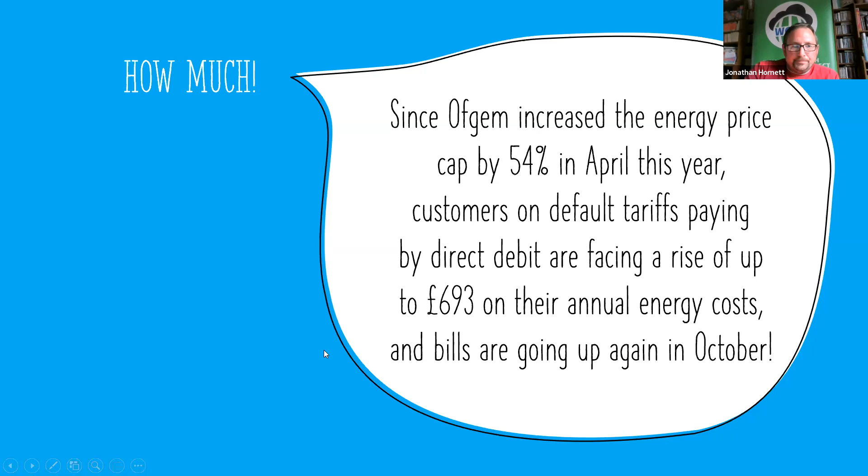So what can we do about it? Well besides keeping the bills down by doing the obvious things like turning off lights, like myself and Greg Haynes had done at the start of this presentation, or running your appliances on eco mode, getting the most energy efficient things that you can, which is what the Energy Basics presentation was all about, there are lots of other things you can do to reduce the amount of energy you're using that you may or may not have thought of.

The big thing you can do is make changes to where you live, make changes to the office or wherever you work. This presentation has a few examples of adaptations and changes that you can do that could save you money and lower your carbon footprint. And believe it or not, they're both the same thing.

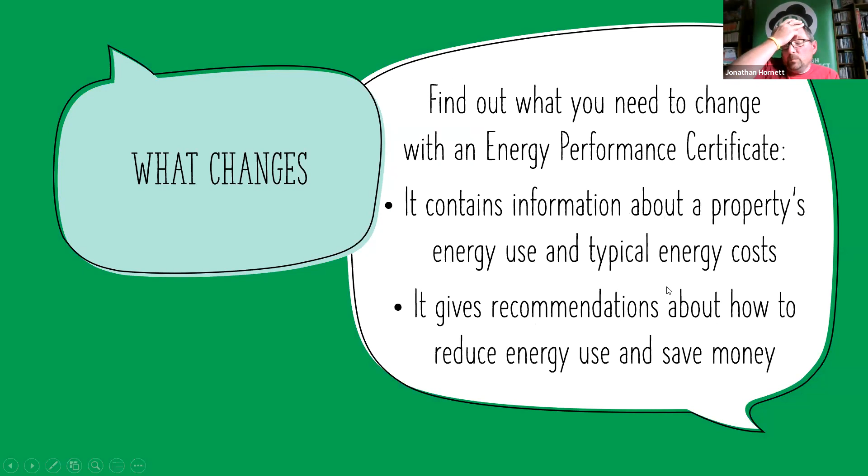So what changes can you make? Well, I've tried to do this presentation with reference to people's houses. So the way I've done it is to look at what would you do if you needed to sell your house or rent it out. Well, the government have kind of helped us with that, which is nice of them.

They've got something called an Energy Performance Certificate, or EPC. The good news is it pretty much does the work for you. It contains information about your property's energy use and typical energy costs, and it also gives you recommendations on how to reduce energy and obviously save money.

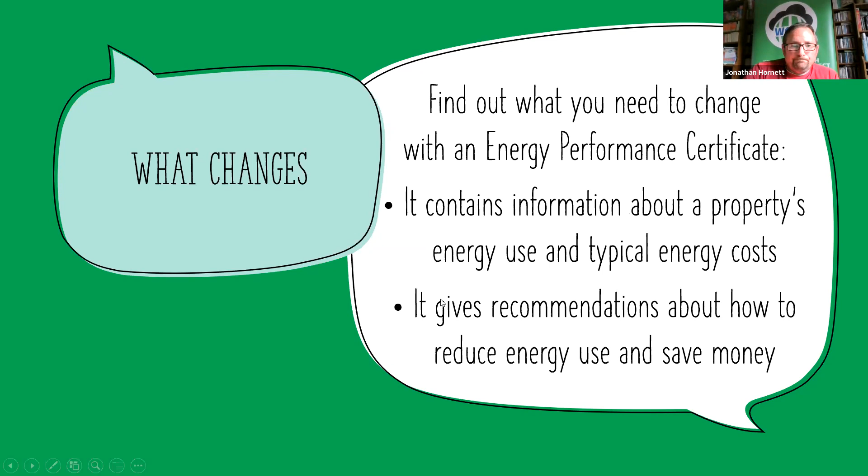Your EPC has 2 charts. I'm explaining all of this to you because I'm going to be referring to this throughout the presentation, so I thought we'd get this bit out of the way. Then hopefully you can follow what I'm saying as we go through the presentation.

The bands go from A to G, A being the best, G being the worst. In the charts you can see what your current rating is and your potential rating, and it also gives you sort of what you can achieve with the recommended home improvements that they've suggested to you.

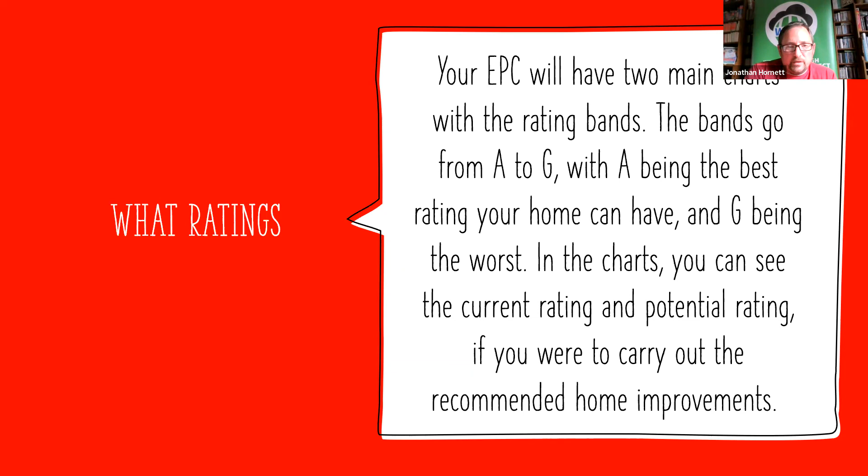So what does one look like? Well, there's one of them. Most people will be looking at their energy efficiency rating because that's the one that saves them money.

As you can see, this house has got a current score of 69 standard assessment procedure points. That's the standard the government have set, their numbering system, going from 1 to 100. Points make prizes, essentially. If you get between 92 and 100 points, you're an A-rated house. If you live, crikey, I don't know what you'd have to live in to get a G, you'd only get 1 to 20 points.

As you can see, these are nicely separated into bands. They look quite a bit like what you'd see on your fridge, cooker, or even tellies now have them on. So the government have done it like this, or should I say the EU have done it like this, and I believe the Brits have now stuck a Union Jack over the EU flag.

Just to make it simple for you so people can understand it. The real advantage is that when you're looking to buy or rent a house, you can compare different houses and work out how much it's going to cost you to have that house.

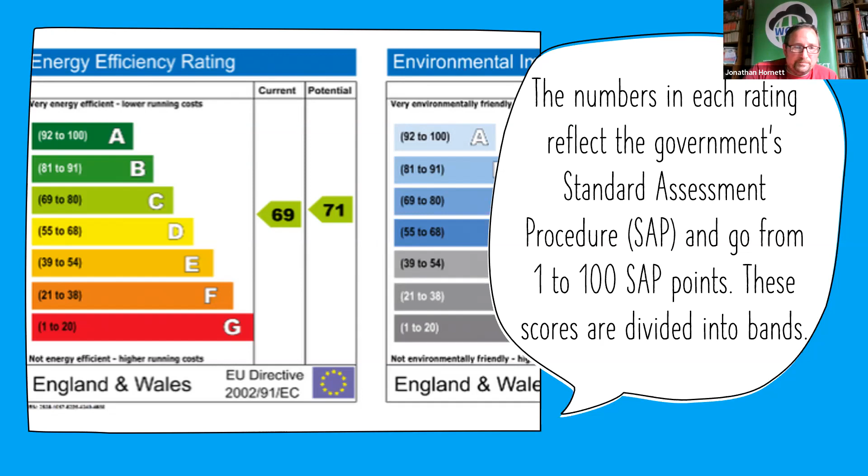But this has two charts, you may have noticed. It also has an environmental impact rating. So you can see the scores are pretty much the same, funnily enough. The difference is about the same as well, 1 or 2 points difference.

So the EPC bands show you how much energy your property will use, as well as how much carbon it'll emit each year. Our house here is a 71. With their recommendations, it moves up to 74. Now their recommendations are fairly basic, so we're going to look at some things that could move it up even more.

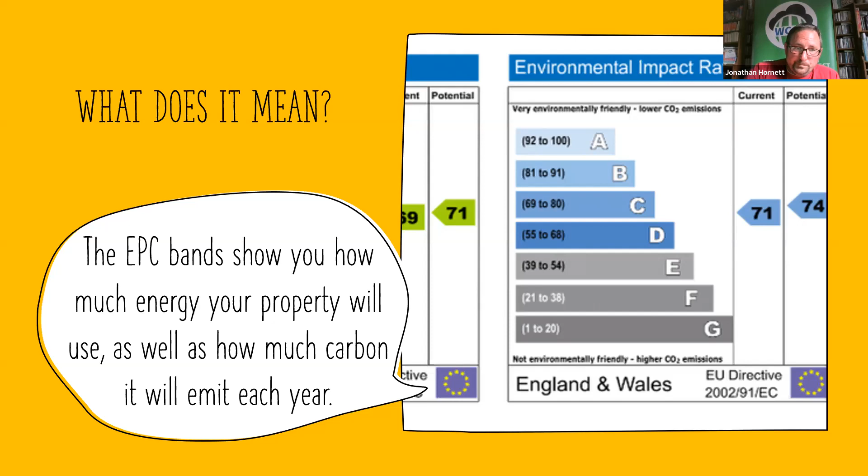But of course, first you might have one of these. I know I haven't. My wife's actually training to do this, so I'm not saying she's offering her services, because she's doing it for the housing association she's working for.

But what most people, and estate agents, would do is look at the government's EPC register to find an accredited energy assessor. It costs between £35 and £100. Obviously, if you're paying somebody to pay somebody else, it's going to be more than if you go and have a look for one yourself.

Once they've done it, or if you wanted to look beforehand, you can look at other people's properties for their certificate on the EPC register. That's quite handy because some of your neighbours might have had it done already.

Okay, the bad news is your efficiency probably isn't very good. According to the BBC, nearly two-thirds of homes fail to meet long-term energy efficiency targets. More than 12 million homes - and I must admit, that's the one thing I forgot to adjust in the presentation, what percentage of actual homes that is - fall below the C grade on the energy performance certificates.

Obviously, like I say, they were graded A to G. So C's a bit like GCSEs, if you like. If you're of a certain age, a C means an O level. I would say you don't really get a pass until you get a C.

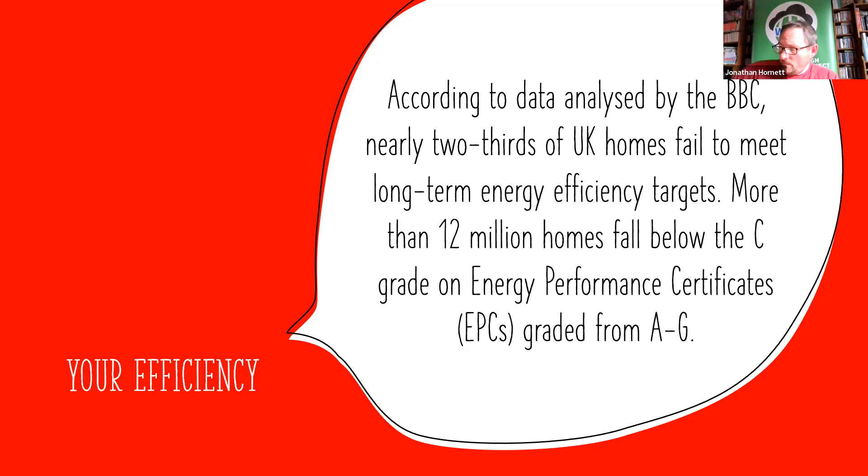Okay, the main reason for this is poor insulation. There's this third thing again, but did you know only a third of homes in the UK have updated their insulation? With energy prices soaring, it's probably the best bang for buck, the best investment you'll get for upgrading your house, is to upgrade its insulation.

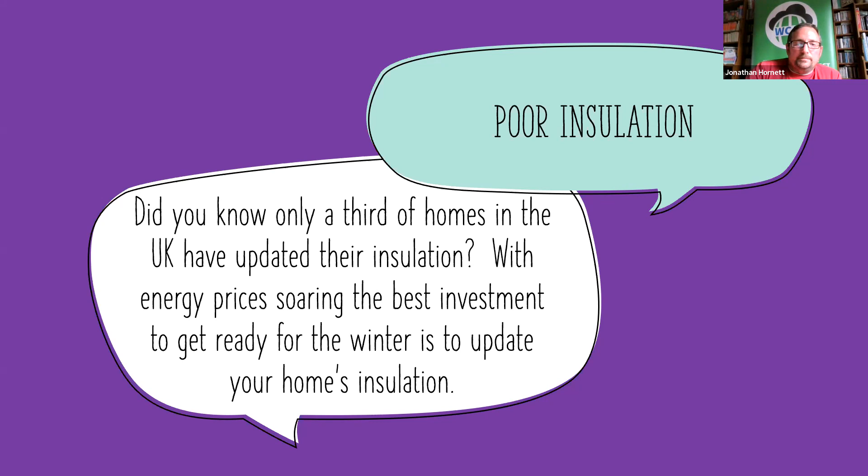So guess what we're talking about first? Well, we're talking about why. We've all got cold houses in the winter, and sometimes very hot houses in the summer.

Only 7.5% of UK homes have insulation age of 2002 or younger. The reason why it's 2002 is because that's when the improved regulations came out. So most houses do not meet current regulations.

In homes built before 1976, and I must admit, I'm going to hold my hand up, this is me, only 0.03% of homes have been updated with additional energy efficiency measures. I'm guessing that probably rules out double glazing, but you can imagine things like loft insulation, wall insulation, all the things we're just about to talk about. So 92.5% fail to meet the current insulation regulations.

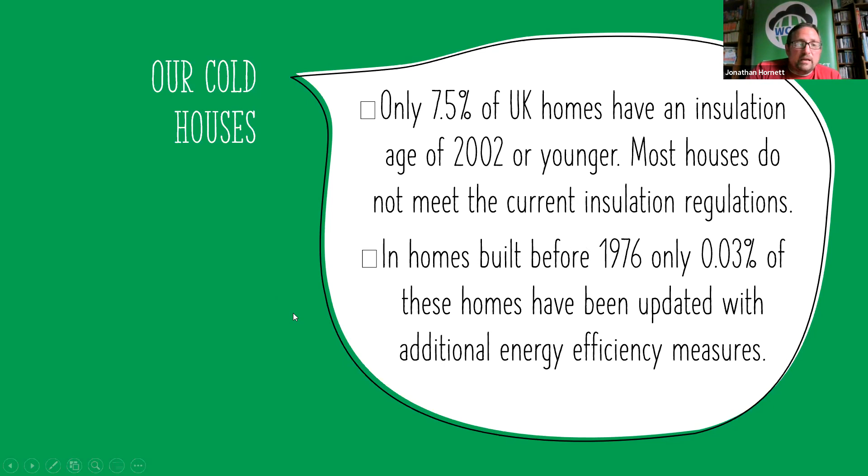Why is it important to insulate your home? Well, it's better for you. It keeps you warmer, it's much better for your health. You're not going to get fluctuations in temperature. It can prevent damp, which is not very good for you - it causes mold and mildew, can cause breathing issues and all sorts.

Future heating changes - this is a big one, because with new tech coming out like heat pumps, you can be ready for anything if you've got a nicely insulated house. And of course, the big one for us on Wellingborough Climate Action Project is that it's better for the planet - wasting less energy means your carbon emissions will drop.

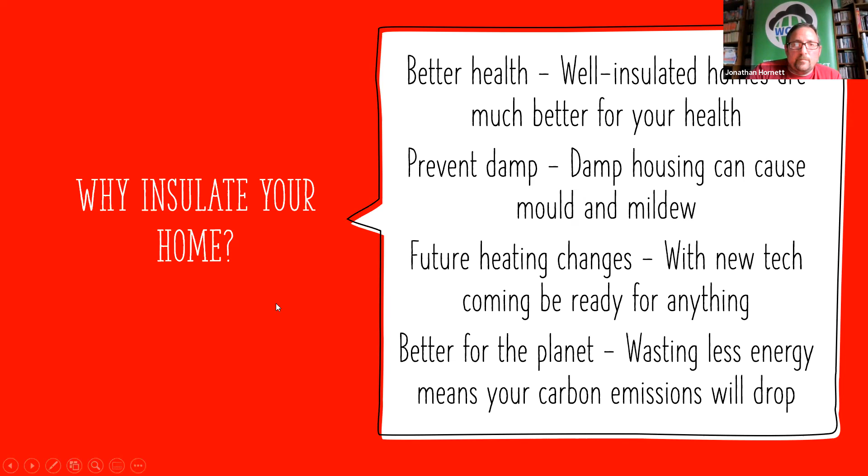So the big message is stop wasting heat. You don't have to burn it, you don't have to pay for it. So the place to start could be your loft. If your loft insulation isn't efficient, 25% of your home heat, a quarter of it, goes out the roof.

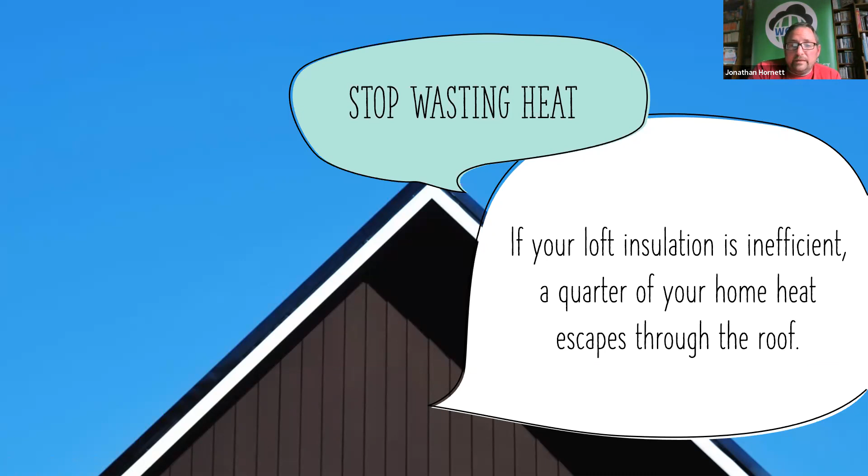We'll have a quick look at that because it links in nicely with your EPC rating. It's one of the cheapest, if not the cheapest and easiest ways to improve your EPC rating. Going from no insulation or really poor insulation to the recommended amount of 270 millimeters, 27 centimeters, can improve your rating by 10 or 15 points.

So imagine if you're on 50, you're now on 65, or 60 to 65. Whilst even a top up of existing insulation can get you 2 to 5 points, depending on what it is, as an improvement in most cases.

This presentation is called energy savings, so we may have a few slides that actually show what the savings are. Here's your first one, I've tried to keep it simple. I know we don't all live in a 3-bed semi-detached house, but that's what most of us live in according to data.

So a typical 3-bed semi will cost you around £530 for a professional installation. You could save £255 on your energy bill. So as you can see, in 2 years you've pretty much paid for the professional installation, as well as saving 600 kilograms of carbon dioxide emissions each year by insulating an uninsulated loft with 270 millimeters of loft insulation.

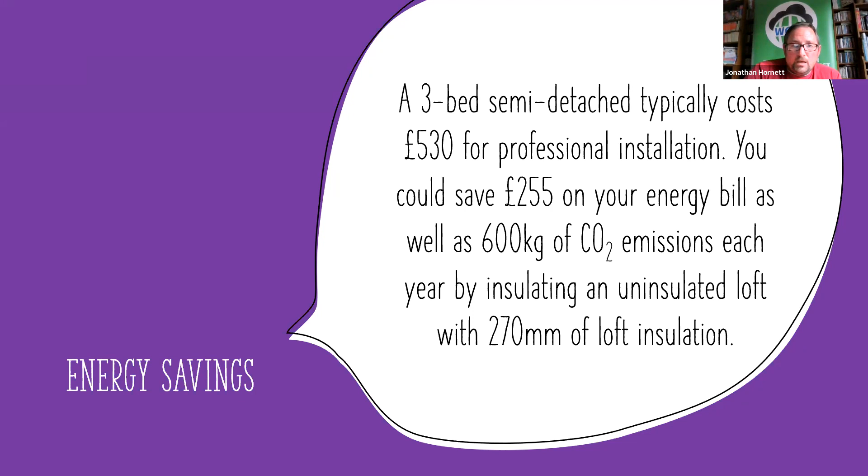Which is staggering. But you could even do it cheaper - you can do it yourself. So if you pop down to B&Q or other leading DIY shops, I'm sure they'll sell it to you cheaper, and it's easy peasy to put in.

It comes in rolls or batts. Batts are long lengths of it that just slot between the floorboards, and it has no damp or condensation problems. It's easy peasy to put in, like I just said. And in many cases, if you've got a relatively easy accessible loft, you could do it yourself.

We've already said the recommended depth of mineral wool - the recommended depth is 270 millimeters. That's for mineral wool, but other materials need different depths. As the world gets bigger and lots of things are going everywhere, there's lots more options.

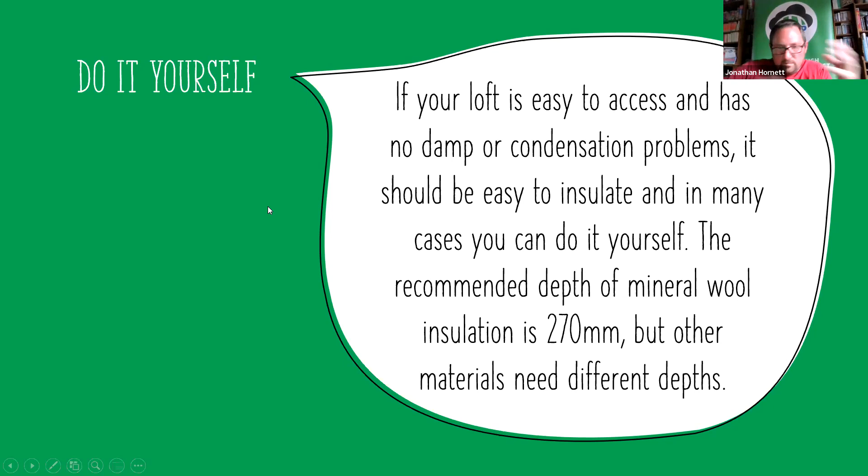So here are a few of them. Obviously blanket insulation is the most common - it's normally glass wool, it has been for decades. It's currently made out of recycled bottles, so that's really green, better than putting them in a hole. And as I said, glass wool is really easy to put down and install, and is really cost effective.

And I'll apologise now for my photos - they've been added as per request of Marion. So that looks almost like one of Greggs' pasties, but there we go. Not one of the Greggs we've got, I must say.

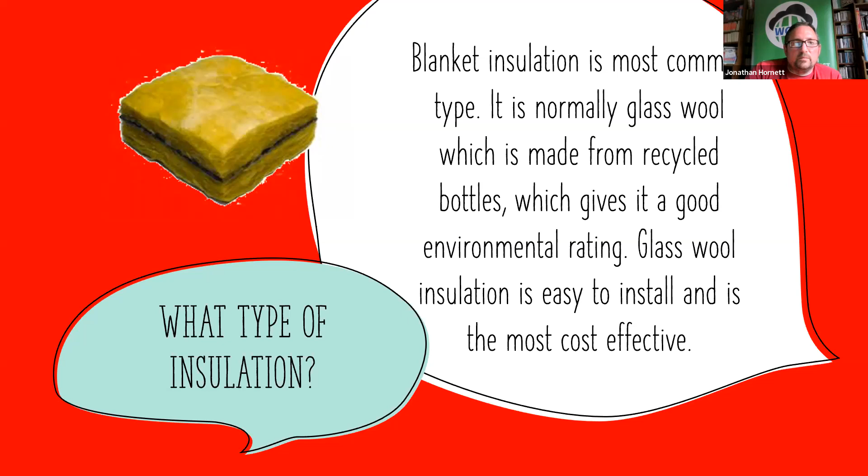And of course there's more alternatives than glass wool. There's rock mineral wool, which is more solid than glass wool, so it's suitable for situations where it can be squashed - it's less squidgy. It comes in rolls and batts, and can come in varying thicknesses. It's also very good against fire, which is a big concern with a lot of the problems we've had recently in high rises. So it's resilient to heat and fire, making it a really good material to use.

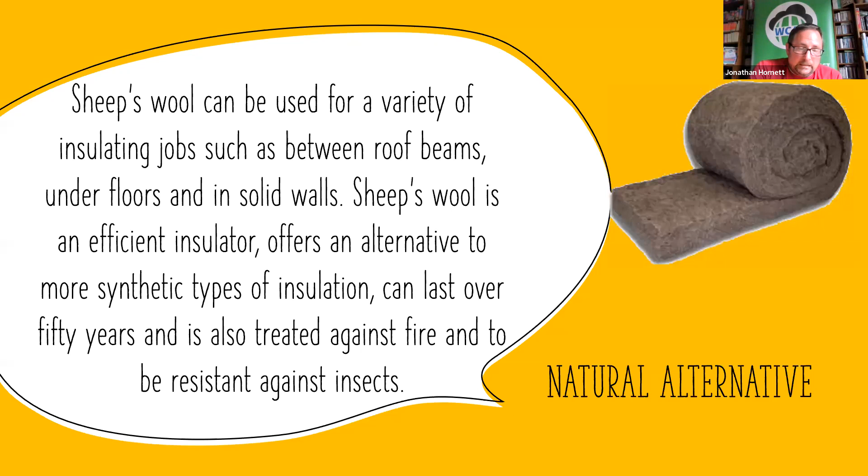Of course, there's more options too. There's lots of natural alternatives, and this is a bit of an odd one - wool is a new thing for this use. Obviously wool isn't new, but using it to insulate your loft is. It can be used in roof beams like the other stuff, but commonly under floors and in solid walls. It's an excellent insulator, which is why you wear it as a jumper. It offers an alternative to synthetic fibres of insulation, and it can last over 50 years. Don't worry, you won't get bugs in it because they treat it against that, and they also treat it against fire. There's also lots of other natural fibres you can put in.

You can have hemp and cotton, just as natural as sheep's wool and just as effective. Hemp is also really cheap, very sustainable, and again you can get it in a roll or as a batt.

Or a slab form. Wood and wood-based products like MDF, plywood. Wood's always been a really good insulator, so there's another option there if you wanted to use that. Believe it or not, recycled paper and plant cellulose. It's another wood-based product, but plant cellulose will do a great job insulating your home. It's equally as sustainable, coming from crop waste, and they do treat that as well.

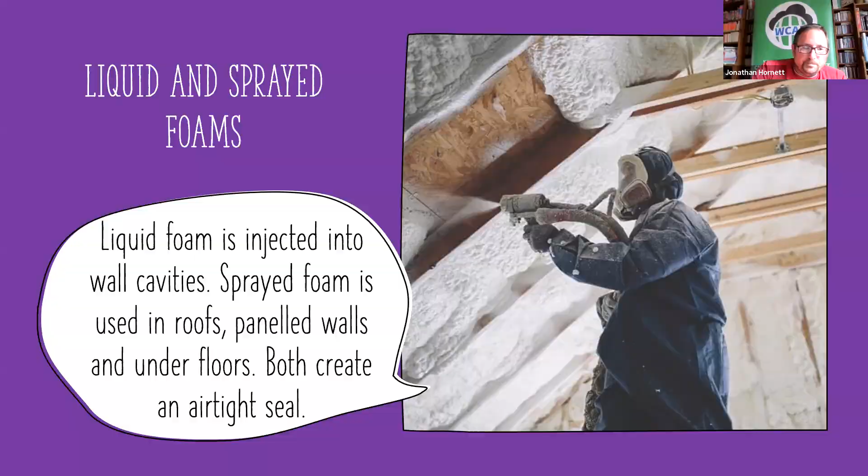There's a lot of bad press for this as well, but if done correctly, this can be up to twice as efficient as with a sealed capsule thing, because it just traps a lot more heat. But you do have to be careful and use trusted people that will give you a guarantee on it, of course.

Just on this one, we used a similar material, not the same, to insulate under our floorboards, and because of the shape of it, it was quite straightforward to cut out the shapes and sit it in.

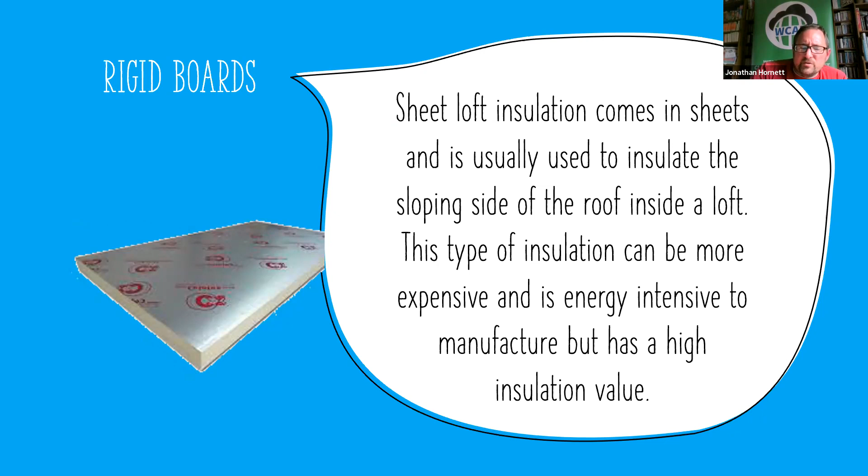Well, believe it or not, when I was Googling for pictures last night, I came up with quite a few people who craft with this stuff. So you nearly had some nice sculptures made out of this rather than just blocks on your screen. But I thought that wouldn't be the thing.

Anywho, rigid foam, if you don't want it sprayed, you can get it in blocks. It's a great thing where weight needs support, like possibly under your floor in lofts, as well as having rigidity and durability.

Rigid foam can also be good if you've got noisy neighbours, for instance. It's got excellent sound insulation, because it stops a lot of the sound coming through your walls and floors. So it's great in flats, you can insulate between the two floors, for instance.

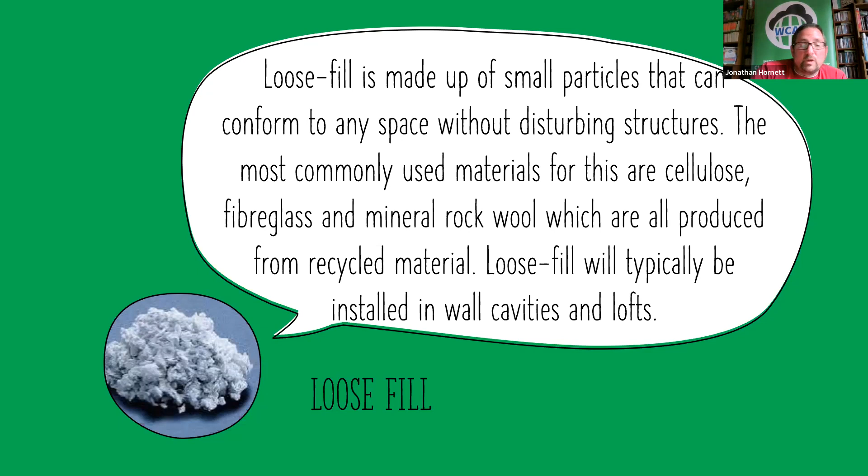And loose fill, as well as having liquid foam put in your cavity walls, you can have loose fill, and you can put this in your loft as well. It's made up of small particles that, just like foam, can conform to any space without disturbing structures. The most commonly used materials for this are cellulose, fiberglass, and our old friend mineral rock wool, which are all produced from recycled materials. Loose fill will typically be installed in wall cavities, but you can also put it in lofts, depending on how often you use them.

We're talking about wall insulation now. 25% of the heat goes through your roof, and another third goes through your walls. It's something not a lot of people think of when insulating their houses, but it's becoming more popular because the prices are coming down. You may have noticed a lot of the housing associations in Northampton and Rushden have been doing it to their properties. It just saves bills - people don't even really turn their heating on anymore because it cuts down on the heat going out, but it also insulates against heat coming in. So it could make your house an awful lot more comfortable.

So if your house was built in the last... sorry, we've got a hand up. Kevin, did you want to ask a question?

Yes, I'm interested in the cost of all these. They're all kind of similar products performing a similar function. I think you've already indicated a range of prices, but all of this depends on the people who need this, probably living in worse homes, older homes, and ones which aren't so well insulated. It seems to depend on the money being available, and we had a lot of free installation offered over the past 10, 15, 20 years.

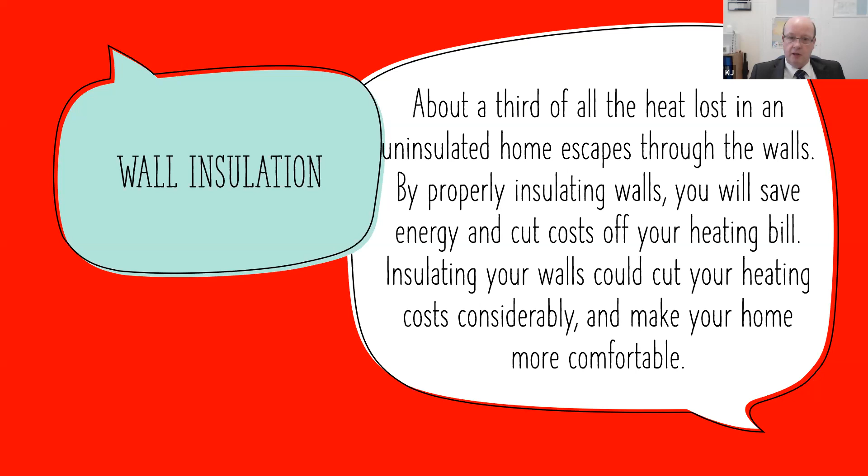I totally agree with you, Kevin, and we are going to cover that right at the end. So I might leave you thinking that, because otherwise I'll spoil the last bit of the presentation, if you don't mind. Yeah, there are considerable costs. I will try and go through some of the costs per type of insulation, and then we'll have a look at what help, if any, is available.

Okay, so if your house was built in the last 20 years, the likelihood is that your walls are already insulated. But if it's older, you need to check what walls you have. Solid walls have no gap. As a rule of thumb, solid walls are the ones that have a full brick and then half a brick, then a full brick and then half a brick. It's an older way of doing it.

New houses haven't quite gone to that artistry, if you like. I used to live in a house with solid brick, half brick, solid brick, quarter brick, just to confuse the life out of you. But new houses basically have the bricks the full way on, because there's two layers to it and not enough room to turn them round and be arty with it. Older houses, like the one I'm in, have the alternating bricks.

So if you've got a solid wall, they obviously can't be filled with cavity wall insulation. If you've got cavity walls made up of two layers, there's a small gap between them, and that's called a cavity.

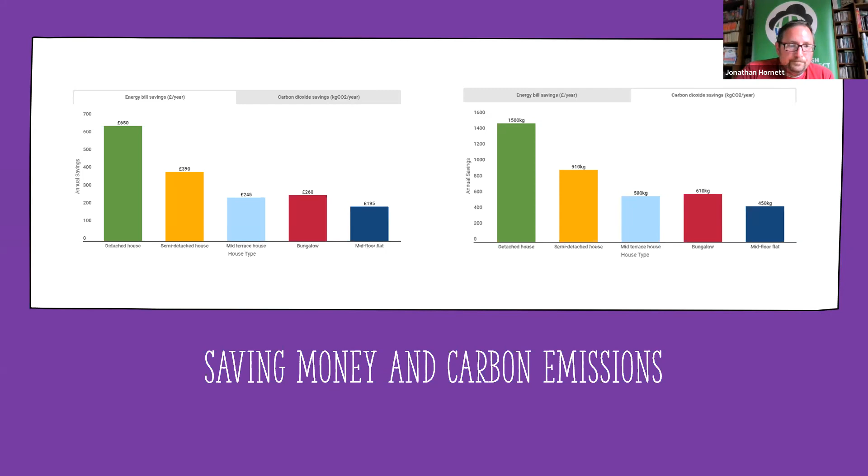So if your property has solid walls, the EPC rating is going to be much lower than an equivalent cavity wall property. The good news is that the rating of the property can increase by 10 to 20 points or more by insulating externally or internally. So if maximising your EPC is your thing, i.e. you're trying to sell your house or rent it out, this could be the way to go.

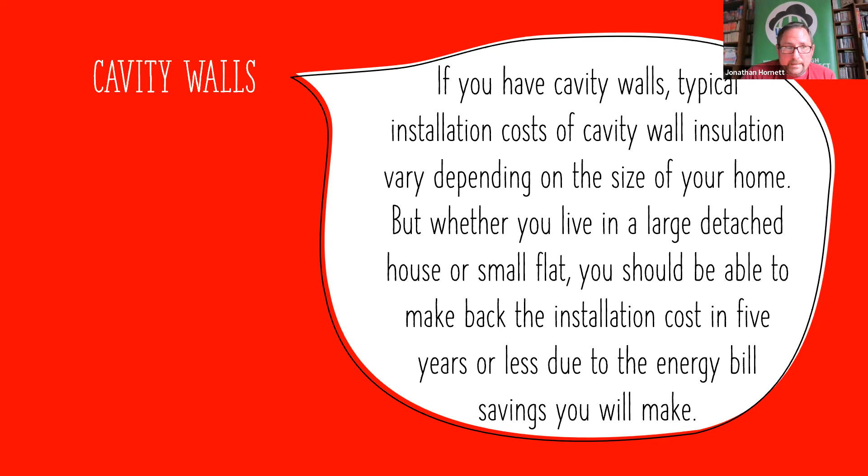But the typical installation costs for cavity wall insulation, if you were unlucky to have missed that boat, depending on the size of your home, obviously vary quite a lot. But whether you live in a large detached house or a small flat, you should be able to make back the installation costs within 5 years or less, and probably even less now that bills have gone up, due to the energy bill savings you'll make. So that's one of the best investments that you can make.

Some people may not have £1,200 or whatever it is laying about, but can still do things like stopping drafts, which is one of the cheapest and most effective ways to save energy and money. When drafts are uncontrolled, and I think we've all lived in houses like that, or I had a friend with a house very similar to Marion's, in the winter you might as well have been sitting in a bus stop. Too much air coming in, and what cold air does is push hot air out. So to draft proof your home, you should block up unwanted gaps that let the cold air in and the warm air out. I'll give you some pointers on that later in the presentation.

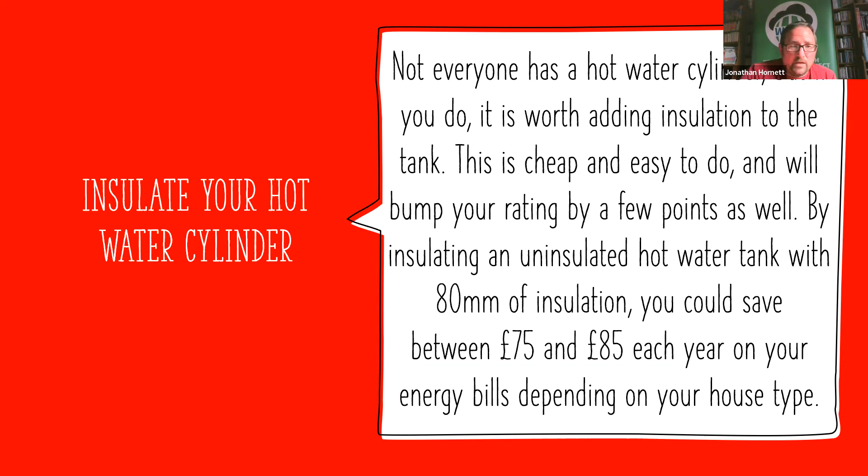So you've done that, you've got a nice warm hot water tank, but you've still got a really old boiler. Upgrading your heating system is one of the key factors in the EPC.

If you have an old boiler, upgrading it to a new condensing model will improve your rating by 5 to even 20 points, depending on the age of your current system. One of my neighbours did it a few years ago. They got rid of their old back boiler, which looked industrial, let's put it that way. Their new boiler cost them an awful lot less money to use, and obviously it uses a lot less energy.

Heating and hot water accounts for half of what you spend in a year. It's what your gas bill's all about if you've got gas, and why your gas bill is quite often more expensive than your electricity bill. All modern, well-maintained boilers burn their fuel efficiently, but inevitably some of that heat just goes up the chimney or escapes through the flue.

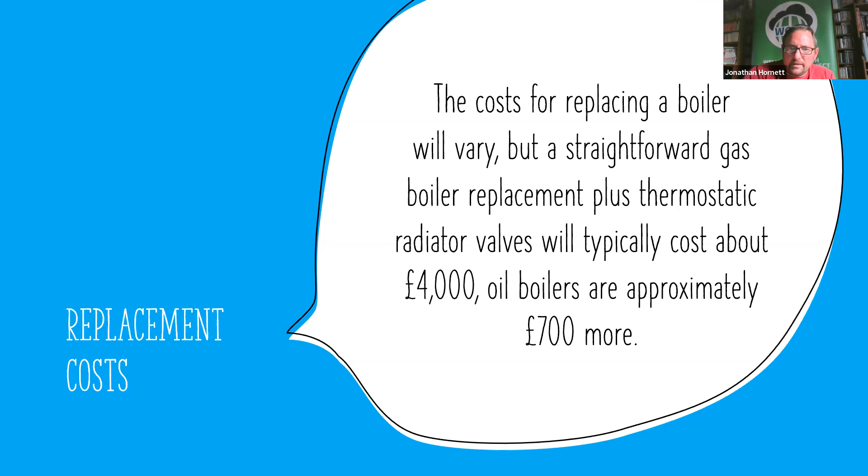I suppose the thing is you're thinking about other options, and maybe something like an underfloor heating option might be more what you're actually wanting to achieve than trying to get that indirectly from the gas boiler. And obviously, if the gases cool down too much, they may not be going out as efficiently as they probably are now. But again, myself and Marion aren't the complete experts on this.

Be interesting, Kevin, to know what rating your boiler has now, with a programmer, room thermostat, and thermostatic radiator controls. So again, it's another huge lump off your fuel bill.

But obviously, and this is aimed at you, Kevin, as much as everybody else, is what's next. It may be time to change your boiler, but if you're thinking ahead for when it needs to be replaced, you'll need to decide what type of heating system is right for you. Now might not be the right time to switch to another gas boiler, because new technology is coming on leaps and bounds. So it might be the right time to switch to a low carbon or zero carbon heating system.

Are you going to say this in your next slide, Jonathan? Almost guaranteed, Marion. Go on, should we go to the next slide and you can tell me if it's not there? No, but it's probably on the next one. I'll do the next two slides and then you can come in.

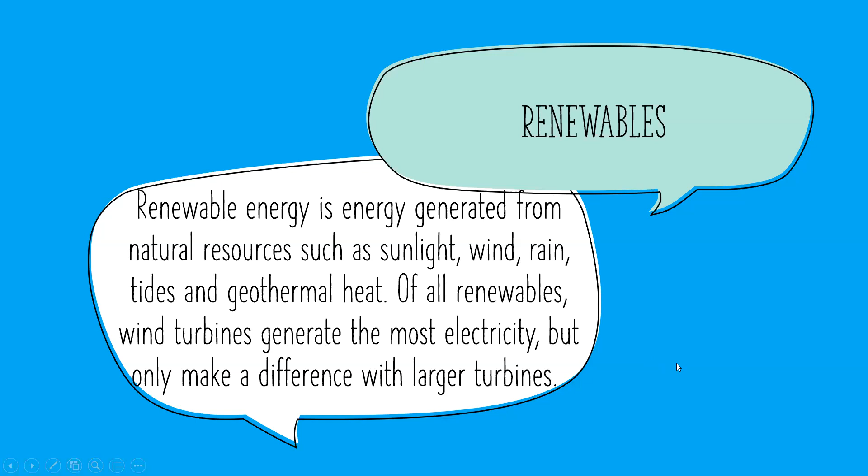So renewables is the subject of our next presentation. I won't go into this too much, but let's touch on it because it does give you big savings, and this presentation is all about energy savings. Renewable energy is generated from natural resources such as sunlight, wind, rain, tides and geothermal heat.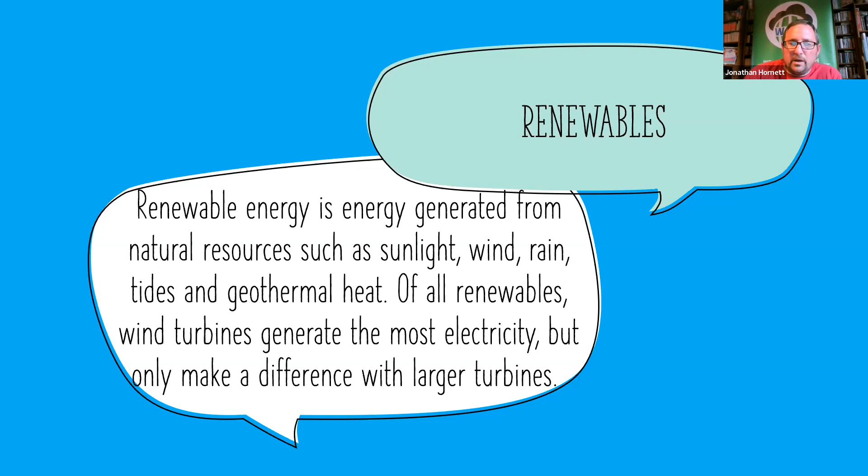Of all renewables, wind turbines generate the most electricity, but unless you've got a farm, you're not going to be able to put a big enough one in or on your property to make much of a difference, particularly when you're talking about your EPC rating. So possibly the best thing to do is solar panels.

Here's a 3-bed semi-detached house again, possibly. By adding a 16-panel, 4 kilowatt solar system, you could produce around 2,850 kilowatt hours of electricity in a year. Plus, you could add 10 points to your EPC rating.

Now, myself and Marion were talking about these slides yesterday. It turns out that Marion only uses about 2,850 kilowatt hours a year. So if it's replacing the heating as well, that would change. But somebody who's preparing a presentation for next week is going to tell us that what he produces more than makes up for what he uses in a year. I won't spoil that too much, but I'm looking forward to seeing his report from what he's been doing over the last few years.

Solar thermal was a big thing before solar PV, solar photovoltaics, came out. My mum's got one on her roof. It supplies all of her hot water and also a little bit for the radiators too. It fills her little tank up quite nicely, keeps it hot for the whole day, and doesn't cost her a penny. She's had it up there for now 15 years, so it's still going and still as good as it was.

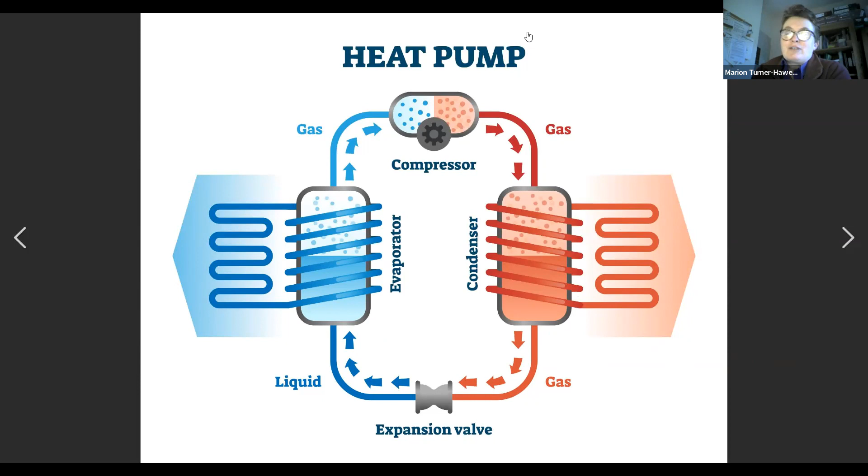And so it's kind of opposite to what we've been doing with central heating systems run by gas or oil. They've been making the surface area smaller, whereas for a heat pump you need the surface area to be bigger. So there's a bit of a problem with that, but I'm not an expert on this, and we have an expert coming next week, so you might want to ask that question again, Gail. That's my minimal attempt at what we're trying to say.

Can I say something? I was watching a program on them the other day, and they were saying you couldn't really put it onto your existing radiator system because the pipes are far too narrow, and the radiators would have to be a lot bigger. Also, to make it viable, you should have an underfloor heating system - that's the only way to really do it, because of the expanse you need under the floor. That's what I heard anyway.

Yeah, so there's a lot of myths, isn't there? I think that picture basically showed a coil system heating up some water which could possibly be pumped around your house, just like your current boiler does. So the answer is I don't know. We do need somebody like Marion's friend from Wales who's going to tell us all about it and try to squash some of these myths.

Yeah, so Darlene will be coming and explaining it all to us next week. Karen, did you want to ask another question, or was that to say what you just said a minute ago? I think Greg's also got his hand up. It was to say what I said before, but it was on a program and they did seem to know what they were saying. So I'm just saying.